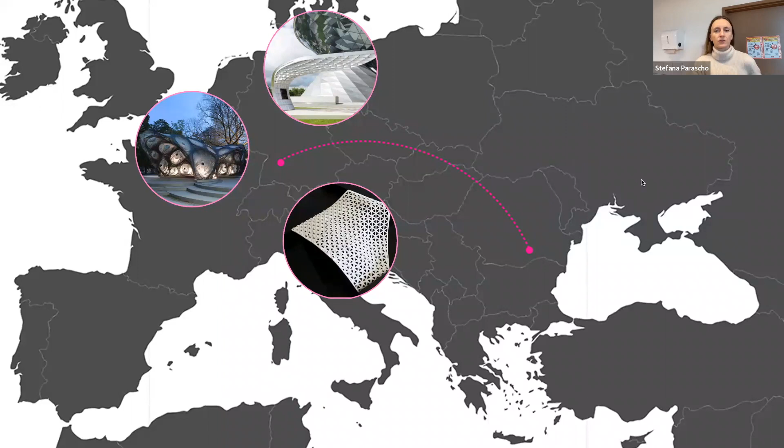After my studies, I moved to Zurich, where I did my PhD at ETH with Gramazio Kohler Research, focusing my work on multi-robotic assembly techniques. Then in February 2019, I made a bigger jump to Princeton University, where I was assistant professor for three years, continuing my work on robotic construction methods—specifically multi-robotic methods—and expanding towards new applications and looking at the long-term implications of digital technologies for design.

Now, since March 2022, so a bit over half a year, I started here at EPFL, where I'm planning to continue the research—it's still a question mark. Soon it should be more specific what exactly we will be doing here, but specifically we're planning to focus on human-robot collaboration for construction.

So I run here the Lab for Creative Computation, Circle. In short, it's a more or less seamless continuation of the lab I led at Princeton, called Create Lab—not to be confused with the Create Lab here at EPFL, so we changed the name to Circle. You can find us at circle.org.

So what are we actually doing here? We really focus on combining design with engineering, robotics, and construction. We have expertise at the lab from architects to engineers and artists, and I'm particularly interested in the relationship between robotics and engineering and the design perspective in architecture. Rather than just thinking about new material processes and how we implement them, I like to explore how these change the way we design and perceive architecture.

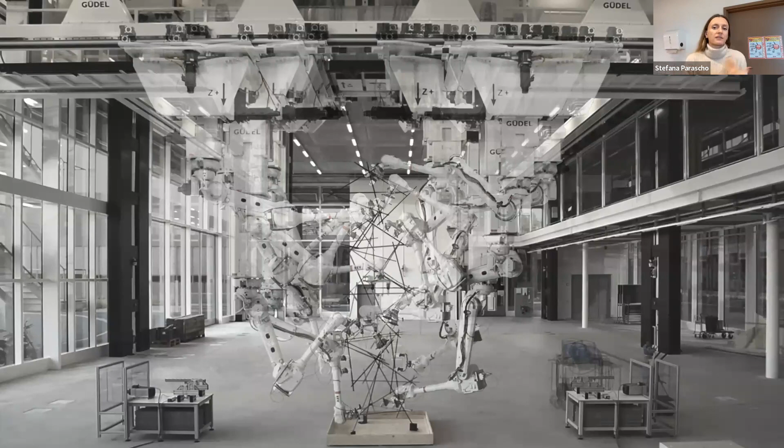So why robots? We look at robots, particularly industrial robots, as generic machines that have specific qualities such as precision, but we look at them from a different perspective than how we're used to seeing them in manufacturing industries, where they typically automate very repeatable tasks—the same object produced hundreds of thousands of times, the robot making the same movements hundreds of thousands of times, such that implementation effort and costs are minimal.

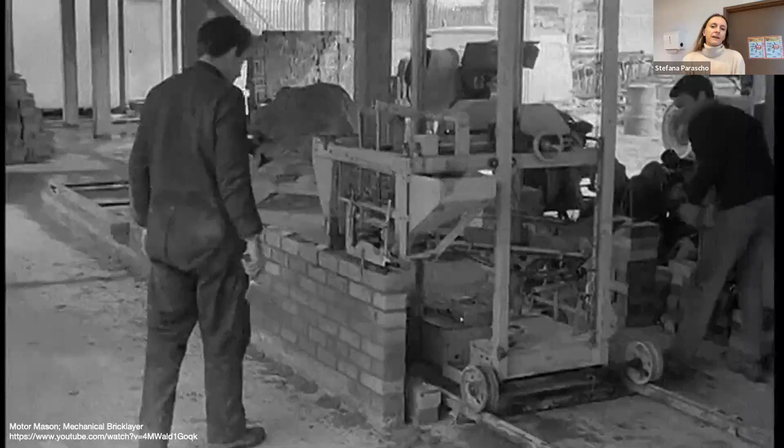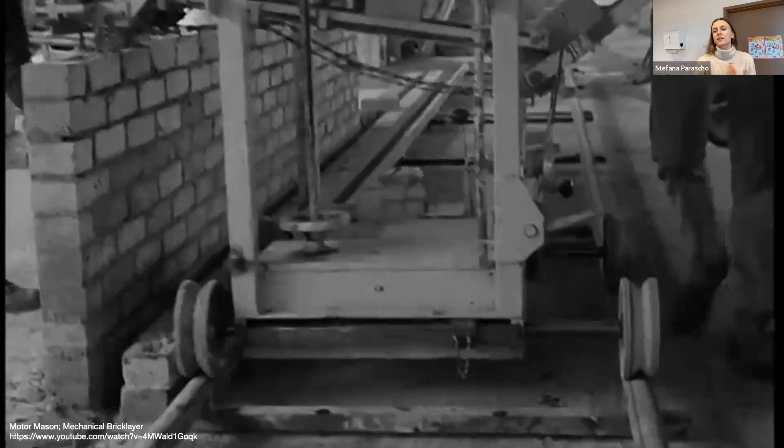We've seen similar intentions in construction even since the 60s. This was a robot from the 60s, still a manual machine that had to be pushed around, but it automated the bricklaying and mortar laying process. Typically what we see in the construction industry is that we automate standardized processes that don't allow for customization or adaptation, but are based on the same processes we know from centuries of analog construction.

So instead, in my field, we look at the potential of digital technologies such as robotic fabrication, precisely in dealing with non-repeatable things—individual constraints, bespoke elements, and differentiation. Basically, a robot doesn't care whether it makes the same movement 1,000 times or 1,000 different movements. So there's clearly potential in robotics for bespoke tasks if we focus less on automating and replacing humans and more on what each of these two parts can do better than the other and how to combine them.

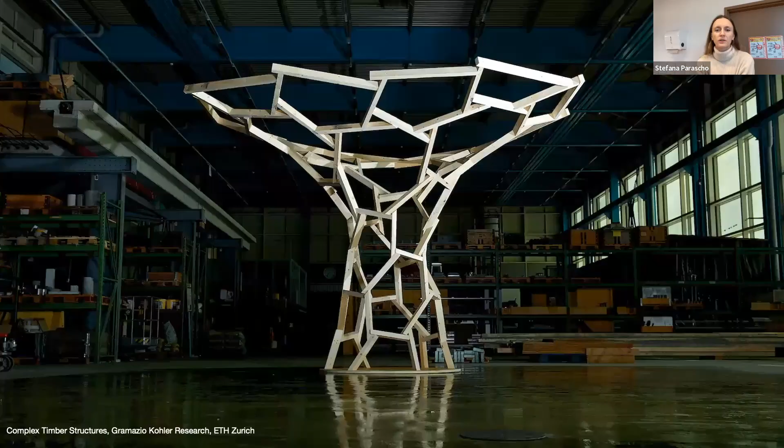We've seen lots of developments in academia in this direction. The field is now about 15 years old, from creating differentiated walls to spatial structures that require individual placement of elements. All of these were built with robots and new material processes. But at the same time, the industry is still concerned purely with automation of standardized processes and increasing productivity that way.

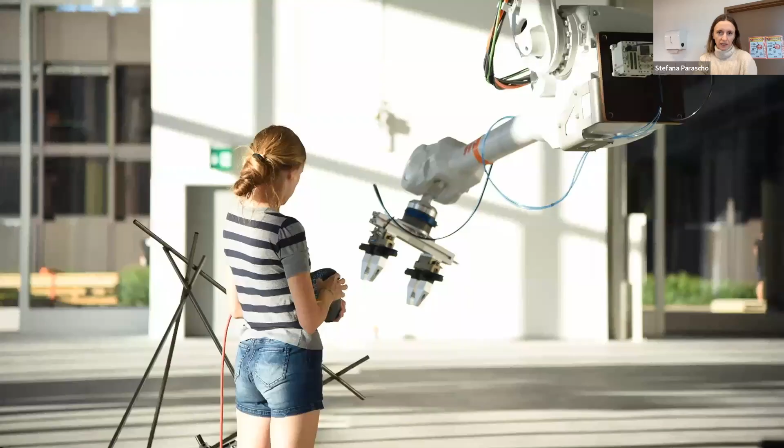So what all the academic projects have in common is they've really looked at questions of how can we build new complex geometries, how can we optimize construction. But I think what we're not asking enough is what do these technologies enable us to do as designers and engineers that goes beyond complex geometry. How can we access new applications and new unexpected goals?

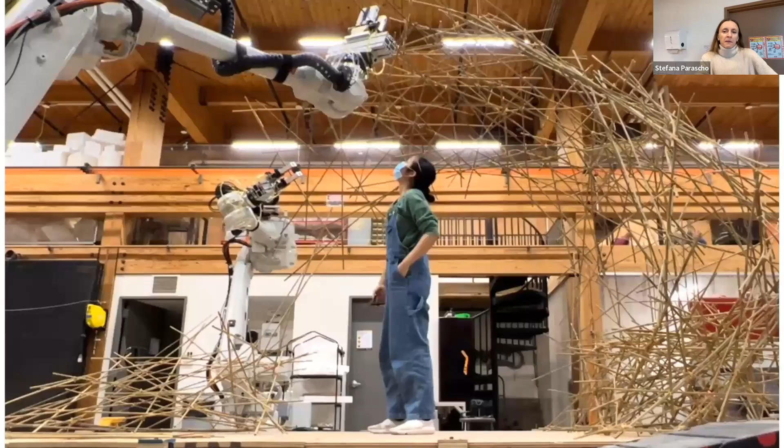In my own work, I like to take a few steps back and think about the role of the machine and our own relationship with technology from a designer's perspective, and look at where the human belongs in this loop rather than where we can remove them from it. My work revolves around using multiple machines and humans, focusing on multiple agents in order to move away from single task processes that are more applicable to automation, and instead explore how multiple agents can collaborate with each other, take on different tasks, and what possibilities evolve from it.

I'd like to walk you through a few projects to give you an idea of the questions and applications that I've been dealing with and that I'm slowly setting up here.

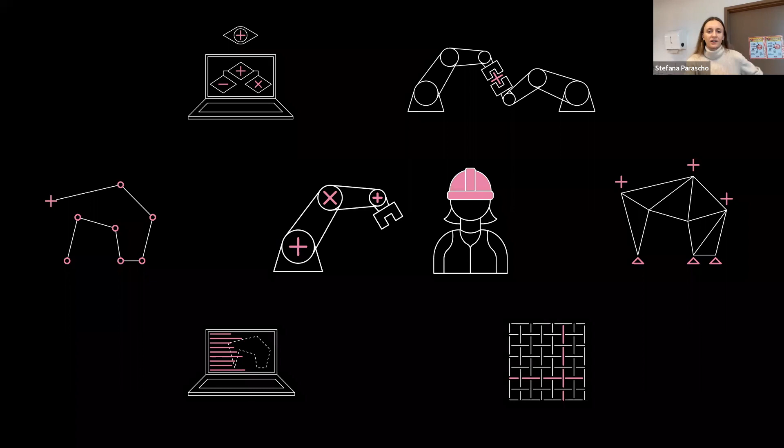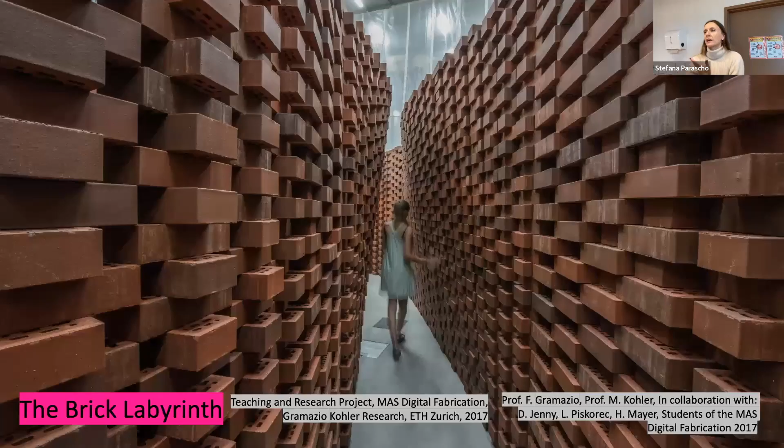Starting with the relationship between structure and fabrication. This is about a project searching for ways of transparent and reciprocal information flow between design, structure, and robotics. The Brick Labyrinth was a teaching project developed together with students of the MAS in digital fabrication at ETH Zurich over 11 weeks. The challenge was to combine planning and simulation with physical implementation and the material tests necessary for such a material system as brickworks.

Brick construction is a long-established tradition in robotic assembly. If you're familiar with construction robotics, it's been one of the first processes to automate, and there have been projects upon projects tackling brick construction. But the reason we chose it, and what we did with this process, was to try to develop a process using only dry stack bricks—no glue or mortar—to make it reversible, and also to scale it up.

This was one of the first projects we did in the fabrication hall at ETH, and it also served as a test of how far we could scale things up.

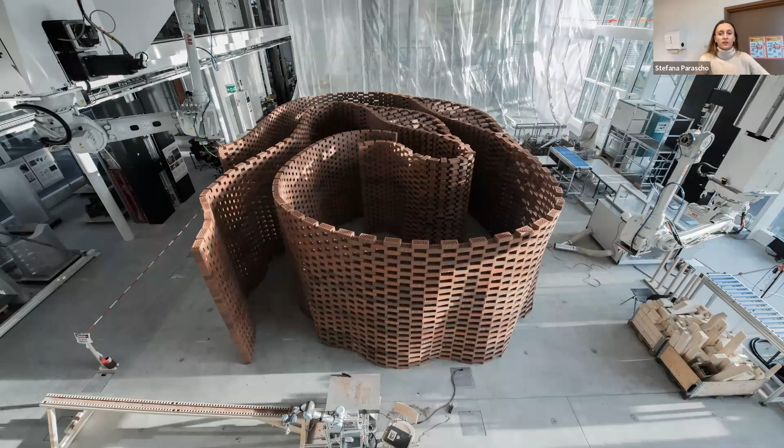The focus of the project was on developing means of simulation and visualization that allowed for safe construction of the 10,000 brick structures, while pushing the limits of the structural system we chose. Students used physical tests in parallel with developing their own simple geometric simulations to quickly evaluate what is buildable and what is not.

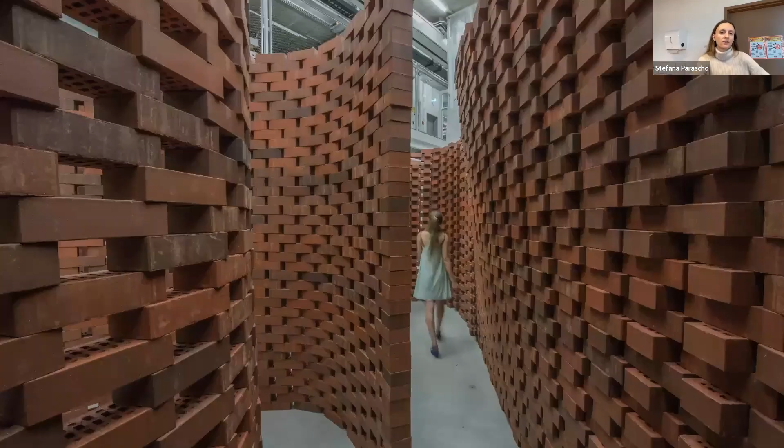We have robotic precision, but this material system works with heavy bricks, which clearly has some dangers with it. So the goal was to increase the height and the angle of these leaning walls through the precise placement of the bricks.

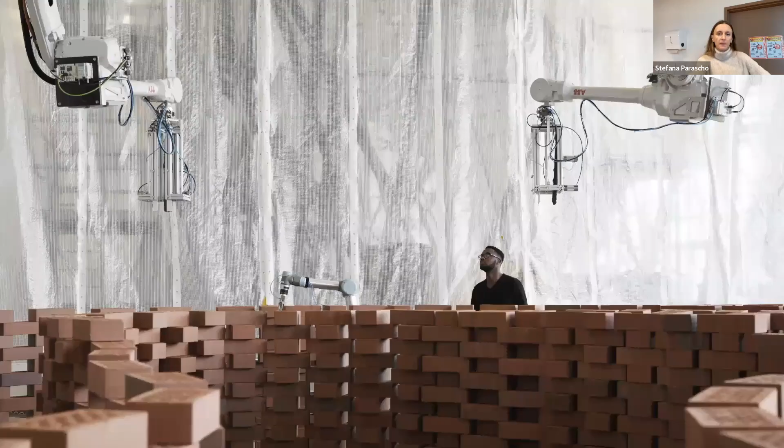In this case, the walls are only stable due to a double layer system that the students found through physical explorations. Stability was, of course, one challenge, but the robotic construction remained the other.

The complexity in the design had increased with the fabrication, since we had to develop a sequential assembly process where the walls had to be constructed in an order that ensured stability, reachability, and no collisions at the same time.

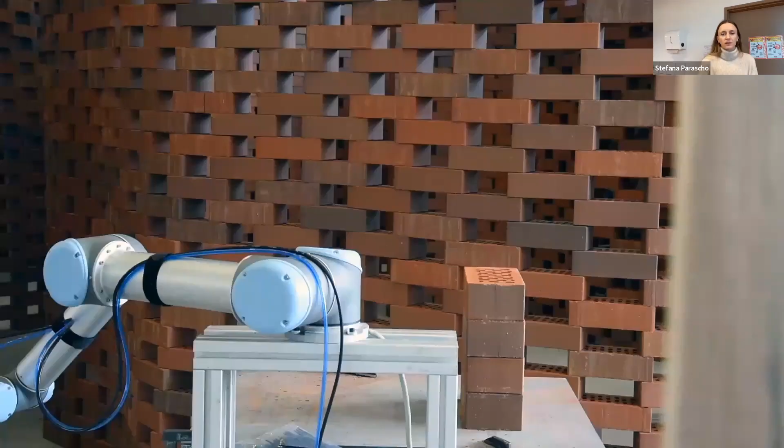Since we're talking about multi-agent construction processes, in this specific project we aimed at full automation. We weren't really looking at the role of the human, particularly because of the dangerous nature of the construction, so there was a purpose in keeping humans away from it. Instead, we used different types of robots of different scales and sizes to take on different tasks.

So you've seen the small robots that are prefabricating these brick stacks, which are then picked up by the larger robot and placed in position. And in the end, this allowed us to build the labyrinth in less than 3 weeks, and it consisted of about 10,000 bricks.

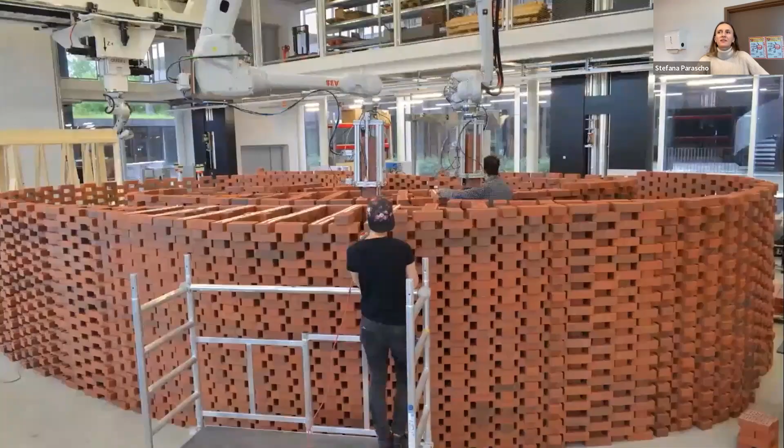Less than 3 weeks doesn't sound so fast. It is fast for us because we run all these processes in manual mode and testing mode, because we cannot test them for robustness as you would in a factory. So every single move is an experiment in itself. If you see them in real time, they move really slowly. So it was an achievement for us.

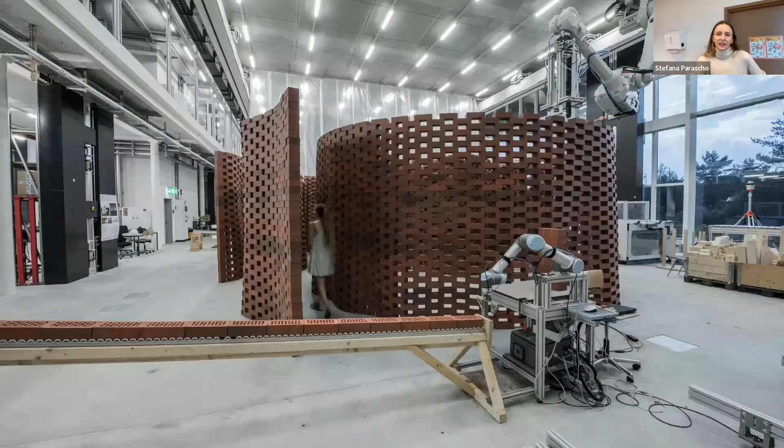I think the takeaway from this project was that for any construction process, we can't really focus individually on a highly specific problem like the sequencing or the placement of the bricks, but we need to consider all the design factors or all the constraints that come together. And that can only be achieved through this combination of physical testing and computational simulation prediction.

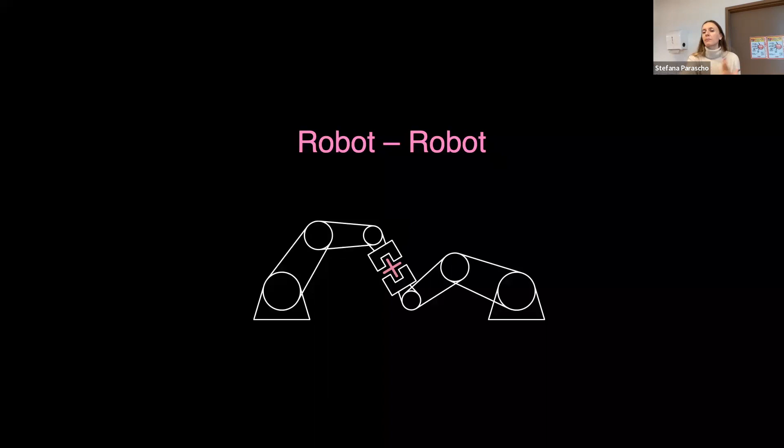So this brings me to my next project, which specifically dealt with these complex constraints, such as they result from multi-robotic processes in which the robots work together. This is my PhD thesis, which focused on cooperative robotic assembly techniques for the construction of bespoke space frame-like structures. By using the robots cooperatively, compared to the previous projects, they don't work separately on their own thing, but they really work together.

And it allowed me to build spatial structures that don't need any additional form or falsework anymore, because one robot can always serve as a support.

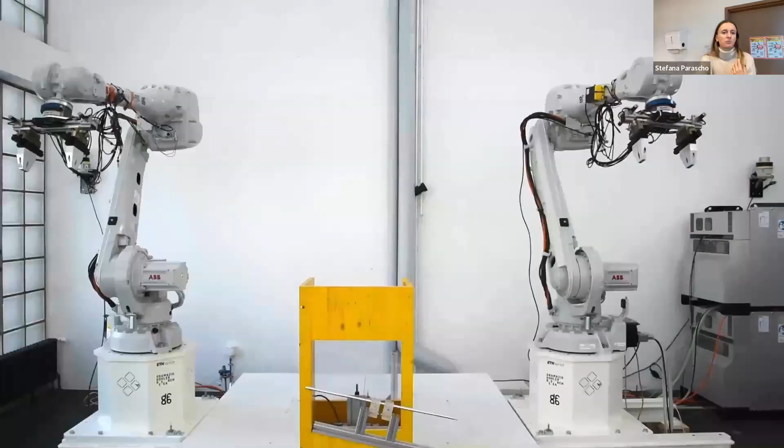So in a simplified way, the construction method works as follows: one robot brings an element, a second robot brings an element, the connection is made, in this case, by humans, and then the other robot can continue. So there's this alternating process, such that one robot is always connected to the structure, and that gives it stability, getting rid of the need for any sort of guide structures or supports.

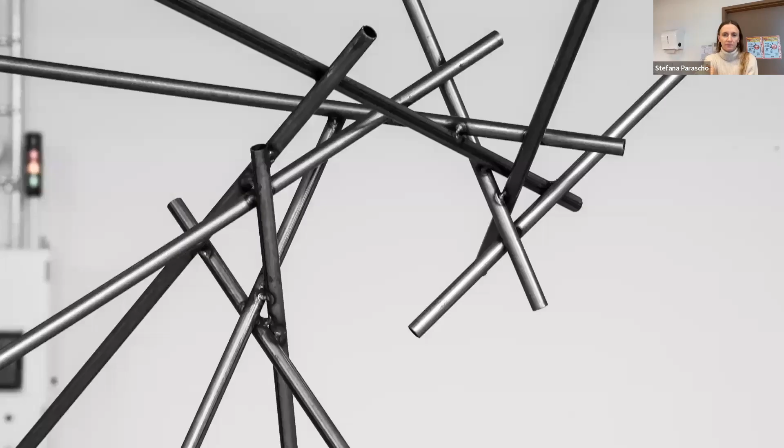But really the trickiest part, or the biggest challenge, was less developing this robotic procedure, but dealing with the highly complex dependencies that emerge from the design parameters that can't really be addressed intuitively. So I'll give you a quick example. When I started looking at this system of space frames, I searched for a new type of connection that would allow for simple fabrication and for the geometric freedom I was looking for.

I didn't want to use any prefabricated additional elements, which require extra logistical effort and fabrication effort. Instead, I proposed an open node where only 2 bars connect to one another at a point.

However, of course, what happens when we shift these bars in a node is that it leads to bending moments in the structure and reduces the stiffness. So in order to counteract this effect, I introduced a second connection point in each joint that results in these closed triangular connections that dramatically increase the stiffness.

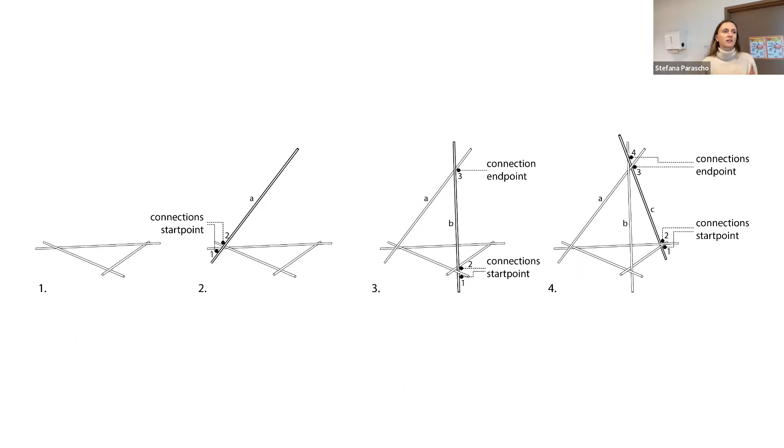And while this solved the structural problem, it led to very, very specific geometric constraints. At every step of the construction, every new rod had to connect to the existing ones at least at 2 points—it had to be tangent to the 2 existing bars at 2 points, which means its position in space was predetermined, it could not be chosen arbitrarily, but was a result of the parameters.

And it leads to a solution space of where this bar could lie that is more complex than it seems. Particularly, there are areas where there is no solution, which have to be taken into account when we try to design the structure. While it's kind of understandable in the graphics, when you have a node with tens of connections, it's really difficult to intuitively understand where the bars should sit and lie. So it's really hard to design with these types of constraints.

So what I'm saying is that this tiny little shift for designing a structure turned into quite a nightmare for a designer, because it's really hard to control these parameters. So we need to think about, besides developing the computational tools to be able to work with these parameters, also ways of analyzing and visualizing these things so that designers can really work with it.

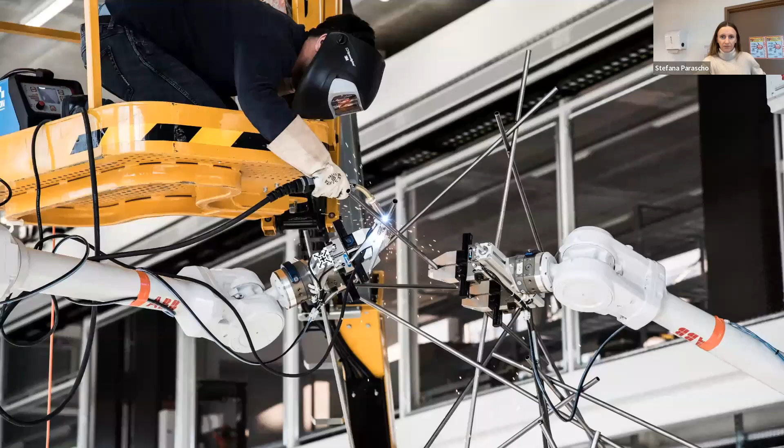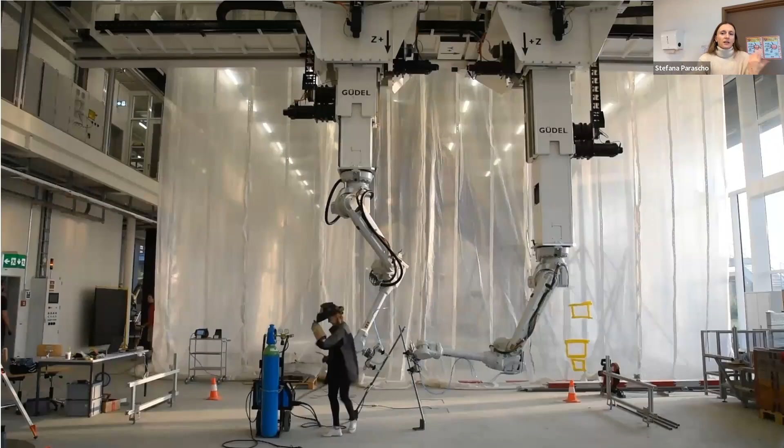Besides the geometric complexities that had to be solved, the actual physical materialization process also goes into the design process. In this case, I worked with a material connection that was both easy to execute and very strong: welding of steel bars. The welding is implemented manually by humans, while the robots are used purely for positioning and holding of the parts.

The reason for this is that I was interested in identifying the processes for which robots are better than humans, which is holding elements in space precisely and for a long time, and vice versa—dealing with very complex movements and little tolerances is something that humans can do very well.

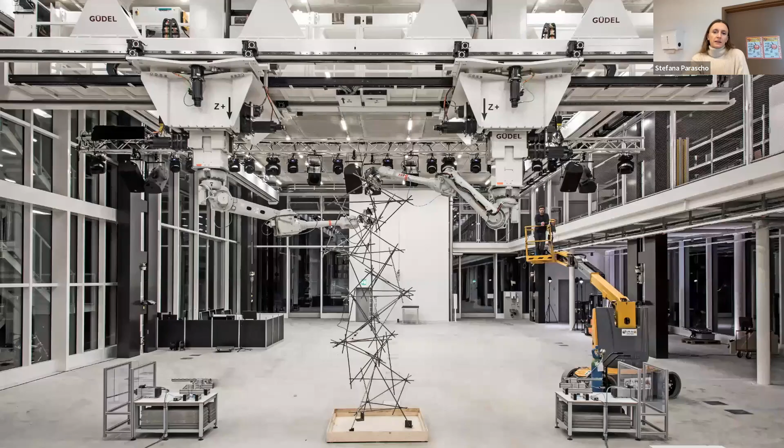That's partly what led into current research that I'm doing, which is on identifying these ways that humans and robots can work together beyond necessarily the separation of tasks.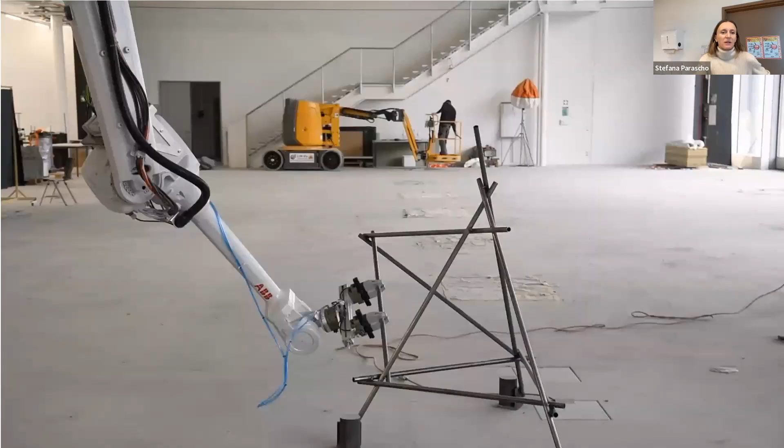Besides the material processing itself, we still have the challenges of the robotic construction method. Working with two robots in the same workspace where they can reach within the same space, and within a constantly changing environment because the structure is constantly adding, is kind of predestined for little catastrophes, meaning collisions. And being active in a discipline that relies a lot on intuition and human creativity, it's not very easy to address these highly unintuitive robotic challenges.

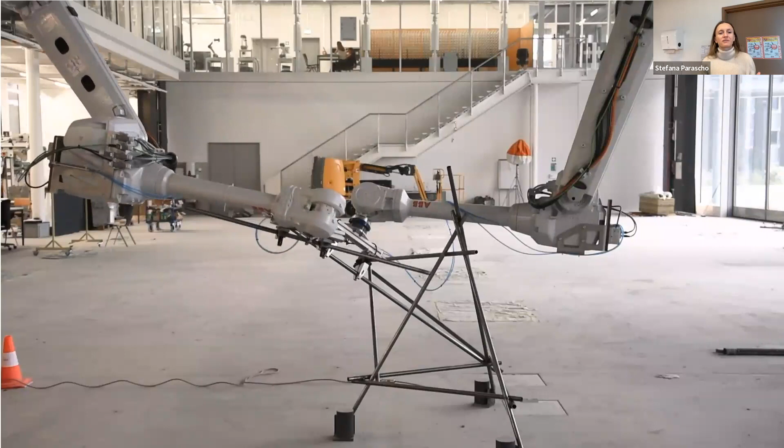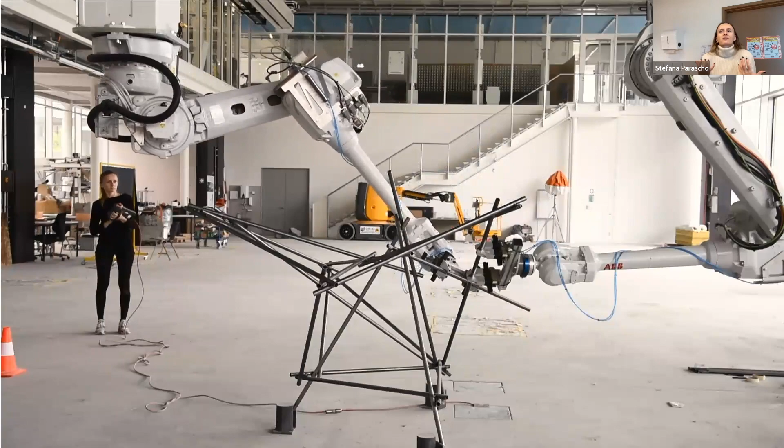So we use path planning here. We connected it to existing path planning algorithms, and we're able to introduce this into designer software so that we can work with it. But really the challenge is to bring together these different types of solution spaces, where as a designer you work in a two-dimensional or three-dimensional Euclidean space, and then the robot has its own six-dimensional rotational space, and it just becomes very tricky to handle intuitively.

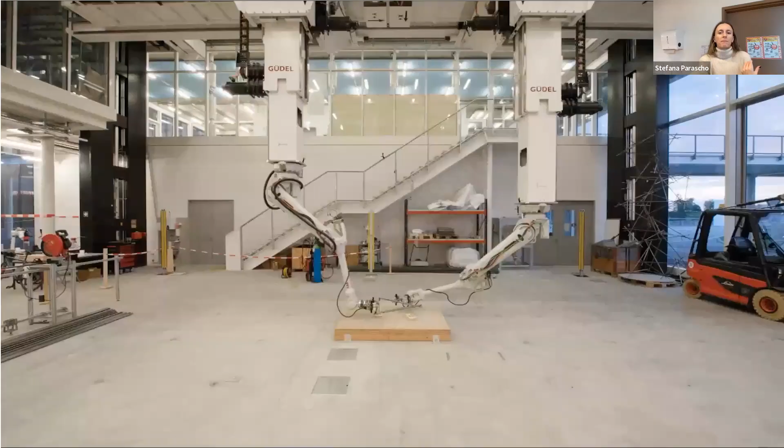All of this led to a sequential process in which the structure is basically designed and generated in the exact same order that it is fabricated, for that exact reason—so that one can check and find solutions for the reachability, path planning, and robotic constraints at every point of the design process, rather than designing a structure and then trying to have it fabricated and realizing it's just not doable because of the constraints and limitations of the robots.

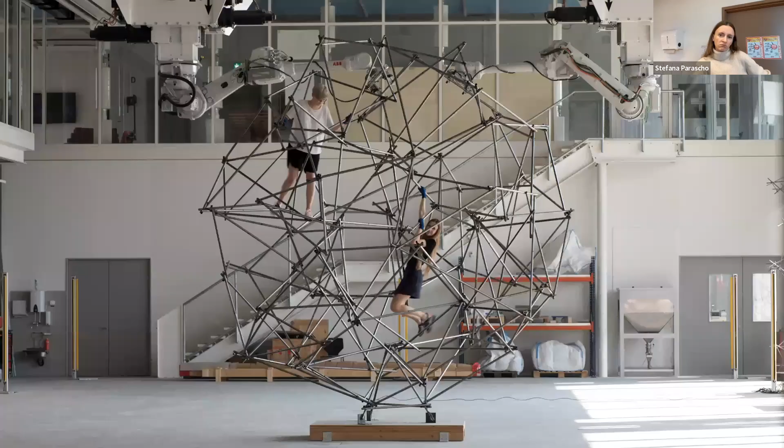This is just an example of one of the demonstrators that we built, which consisted of over 300 elements. And then we did some very professional load testing. It behaved as expected.

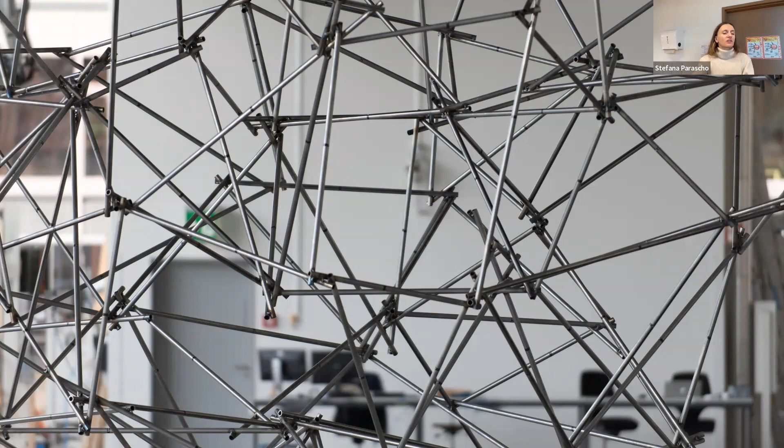What I want to say with this project is that using the digital technologies we have available, as designers it can very quickly turn into a rabbit hole of dependencies and all sorts of unintuitive problems that designers are not typically prepared for. This makes the acceptance and application of such technologies a lot more challenging than in non-design-based fields.

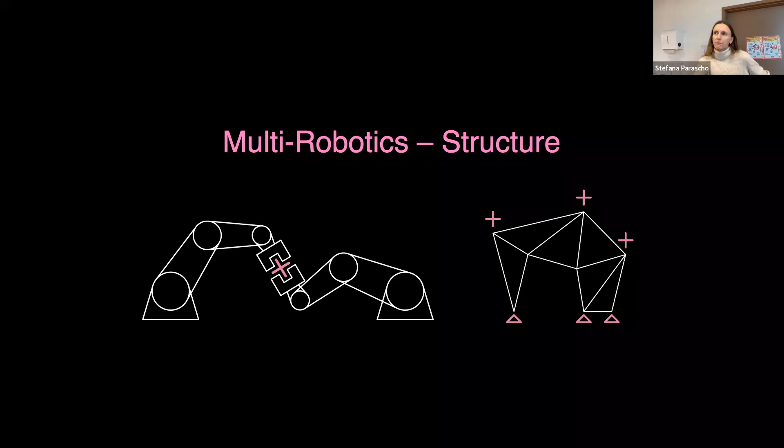Building up on the previous two projects, the following one combines basically the brickwork and the multi-robotic assembly techniques. The LightVault is a collaboration with SOM Engineering and with the Form Finding Lab at Princeton University. It resulted in a prototype that we exhibited in London in 2020—unfortunately only for a few days before the COVID lockdown, but we still got it built, so that was a success for us.

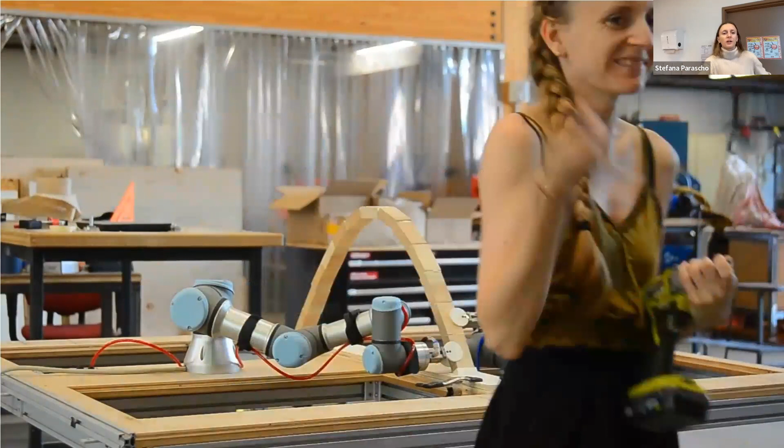We focused on finding ways of constructing vaulting structures out of heavy brick material again, based on the methods I had developed for the steel structures, using the two robots to collaboratively assemble an arch such that it does not require any sort of support structure, guide, or additional support.

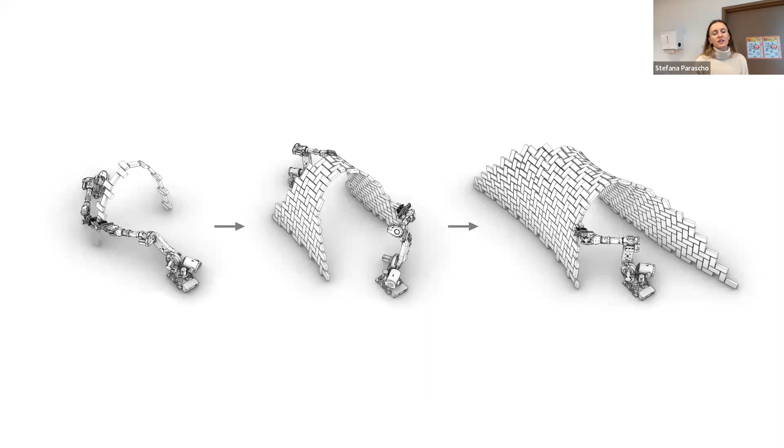The challenge, again—well, there were many challenges—but maybe the main one was designing the structure in a large interdisciplinary team with different vocabularies and expectations. What it resulted in was a glass brick vault that was built with two robots, starting with a cooperative arch that could be built by two robots working together, which served as a backbone structurally, and then continuing with the robots working individually from the arch outwards to complete the structure.

And instead of working through individual design options, sending those around through the team, we specifically used the robotic setup to identify and visualize the design space that spans between them, and to find out the influence that the sequence and the building direction had on possible designs.

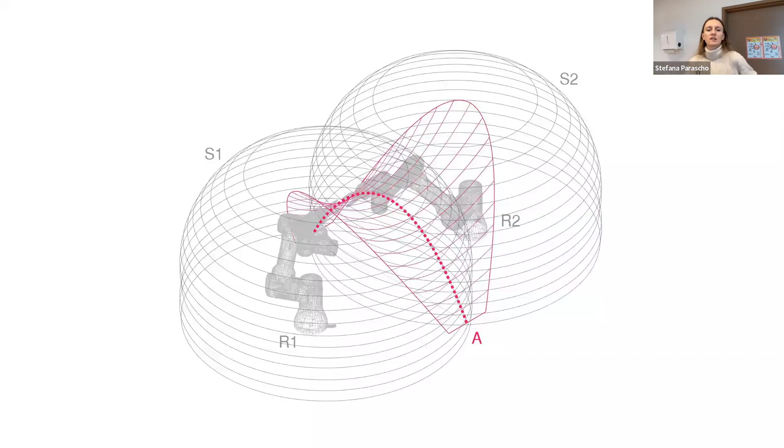So, for example, the vault is shaped upwards towards the ends, not only for structural reasons—it did help structurally as well—but also because of the reach of the robots. Where they have to work together, they need to reach a bit lower, and then they start building above their own heads, so to say. So it was a result of both the reach of the machines and the structural requirements.

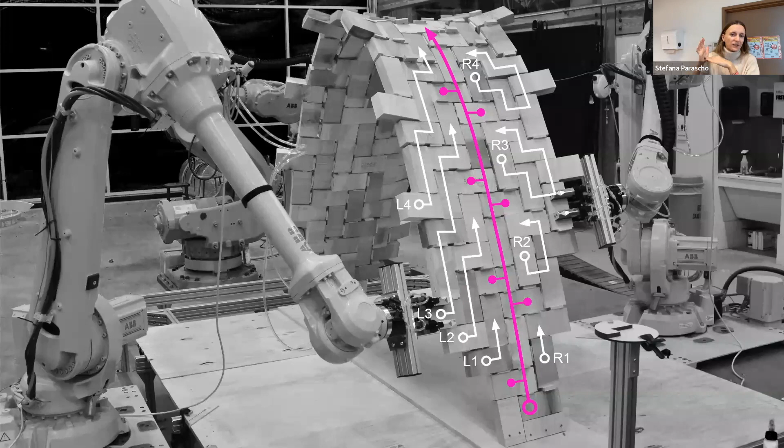And all of these temporal dependencies—where do we start building and where do we end—they also become quite visible in the pattern and the sequence definition that we came up with, which had to ensure stability not only at the end, but also during construction at every step. So, for example, we calculated a sequence such that every brick, when it's being placed, has two sides where neighboring bricks exist that you can connect to, so it never just sits on one side, so that it doesn't just fall off for no reason.

We did use glue in the structure for several reasons. One being that this was exhibited—it was built during the exhibition in a publicly available space—and we had people running around, so we really didn't want to risk anything. But also to ensure the stability during construction. We had form finding done for the final shape to make sure it's only under compression, not for every step of it. We did have an analysis to check every single step to be sure that it was stable, but the design process was not made such that at every single step it would be stable without the glue.

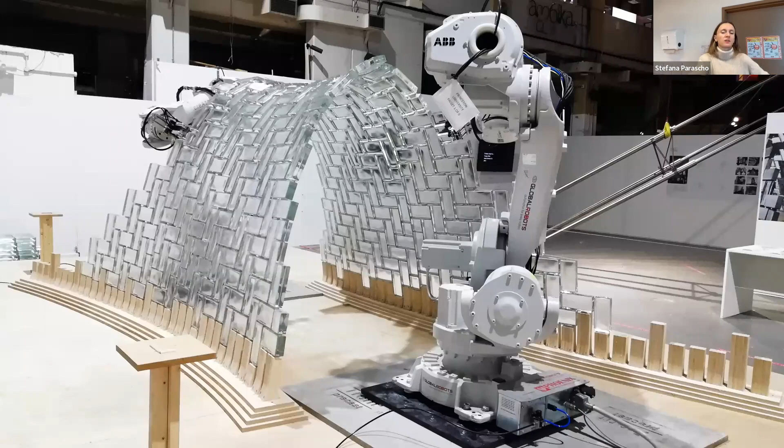And I have a short video that I would like to let run, just to check on the sound. I don't know if it goes through Zoom. Otherwise, I hope it's not super boring for the ones watching, but I was just going to let this run.

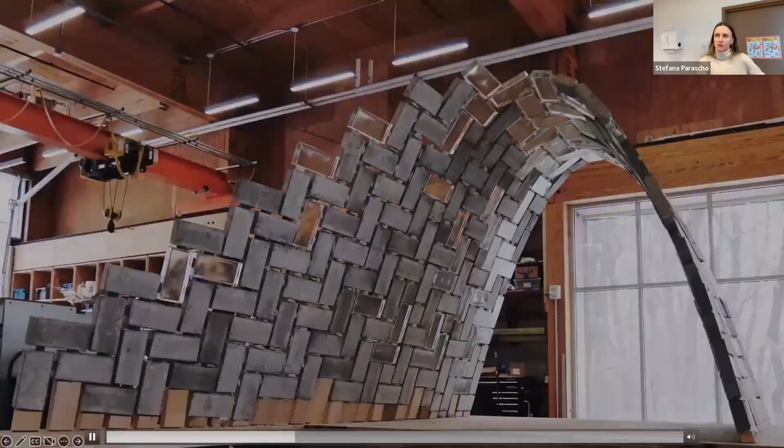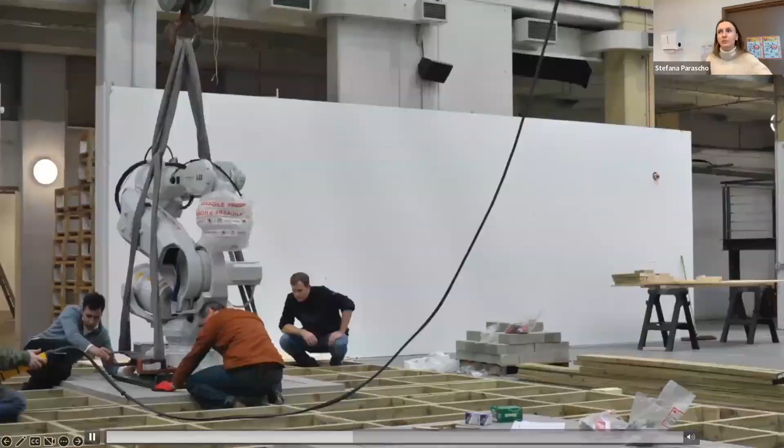Just in case the sound isn't working, I'm just going to randomly speak a little bit so it's not so awkward in the recording. We tested everything in the lab back at Princeton, and we did quite some prototypes over there with concrete instead of glass, because it's cheaper and easier to make.

And then we moved everything to London. We had two robots that we borrowed from a robotics provider over there that we set up locally, and then built it all in situ.

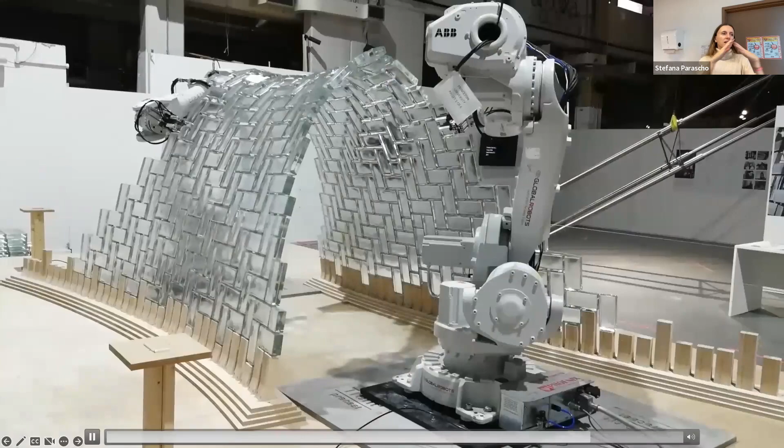They sit somewhere in there.

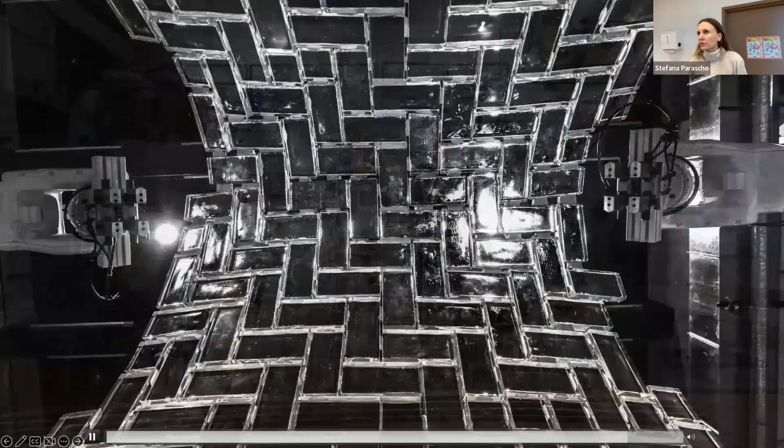Right, sorry if it didn't have sound. It's a bit sad to watch three minutes without sound. But you can find it online if you really want to see it with the sound.

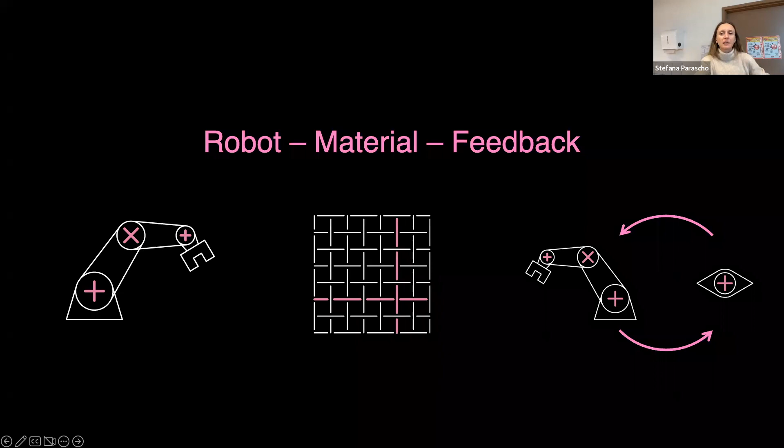So yeah, this brings me to my current projects, things that are going on right now at the lab, where I'm looking at applications that go beyond the construction of complex geometries. Zero waste is one project that I started at Princeton University in collaboration with Aaron Bessler, a design professor there too, in which we investigated what role robots could take on in monitoring existing structures and engendering material reuse. So I'm currently continuing this line of research here at EPFL in collaboration with Corentin Fivet.

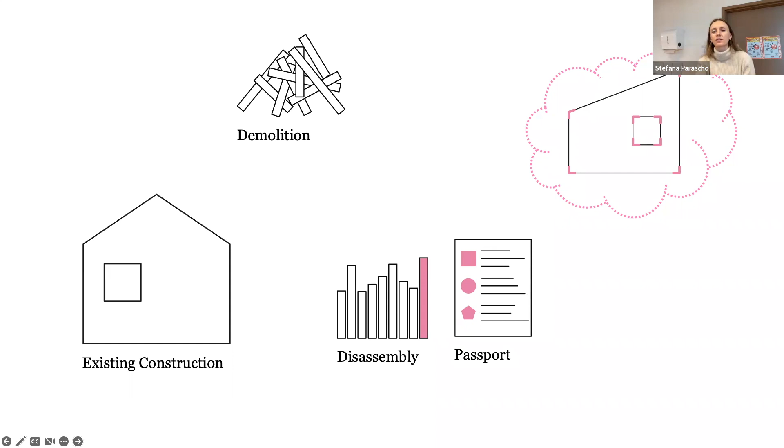Back at Princeton, we started by looking at the life cycle of materials and how much waste is produced in construction, and identified two main questions. How can we work with the existing material that's currently in use in buildings, and how can we plan and build new buildings, or even those built out of reused materials, such that they specifically facilitate the reuse of the material in the future.

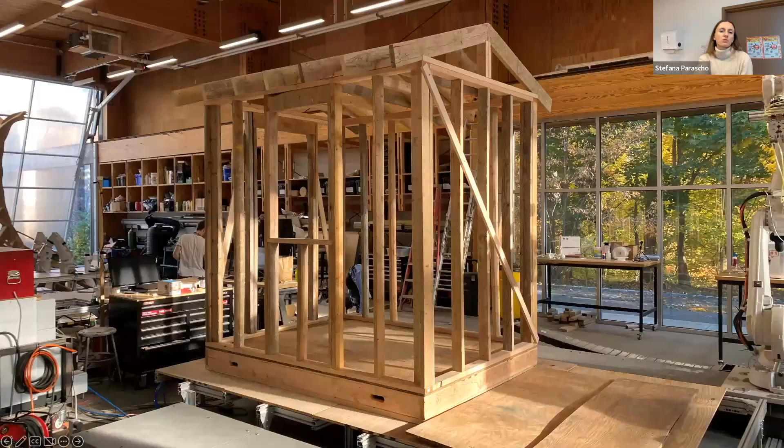So we went all in. We handpicked a number of timber elements from the local recycling facility, which we then assembled into a shed, this time by hand.

This was not built by robots, built by students. That was meant to be representative of the typical American wood frame construction. It's really the sort of material system that is widely used in the US, and what we wanted to work with.

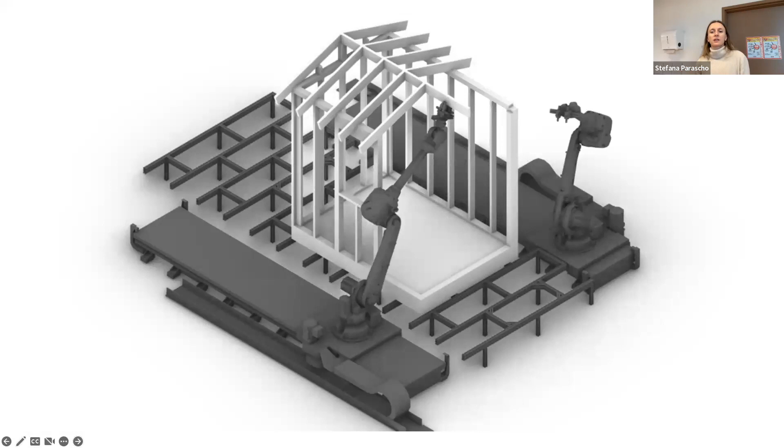We looked at two topics. On one hand, how can we use robots for the disassembly and reconfiguration of such structures, going back to the advantages we identified, that robots can serve as support elements and take on different tasks, not just assemble things.

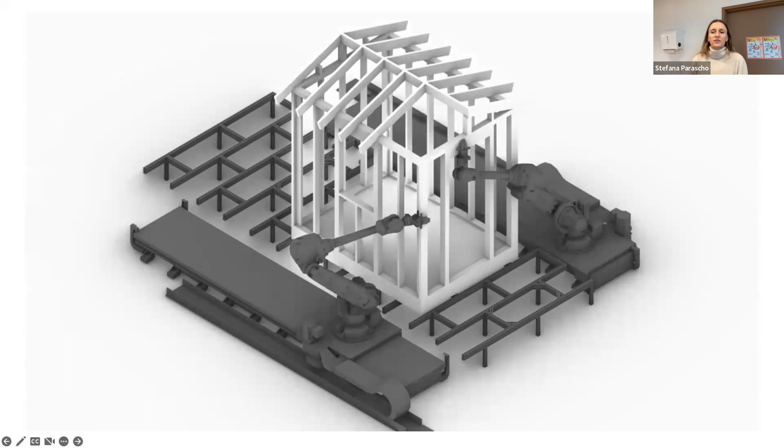The second question was how we can develop a scanning and tracking system that not only recognizes material components and stores information on their use, but also helps visualize this type of information for non-expert users, to increase awareness for reusability and material history.

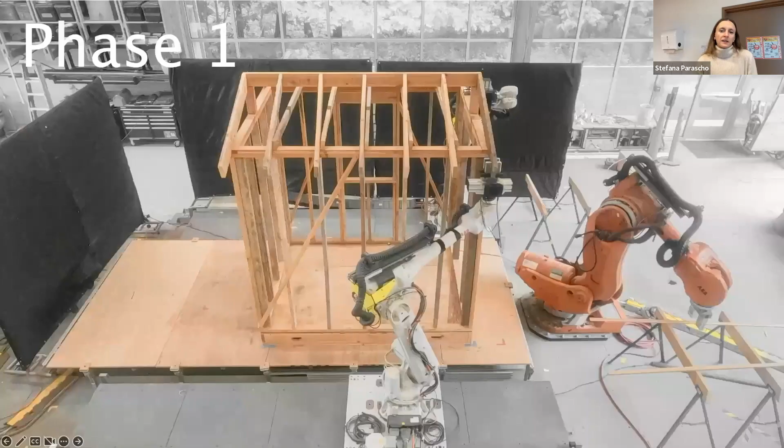These are results of the first implementation of this case study, split into four phases, each exploring a different spatial process. The first was pure disassembly using three robots this time. The second phase was disassembly, then using the same material to reassemble parts of the structure. Phases three and four try to get the reconfiguration done in the same process as the disassembly.

We're now expanding this approach to have more automated planning for real-time reconfiguration of structures. It's a project that will start early next year, so hopefully pushing this forward.

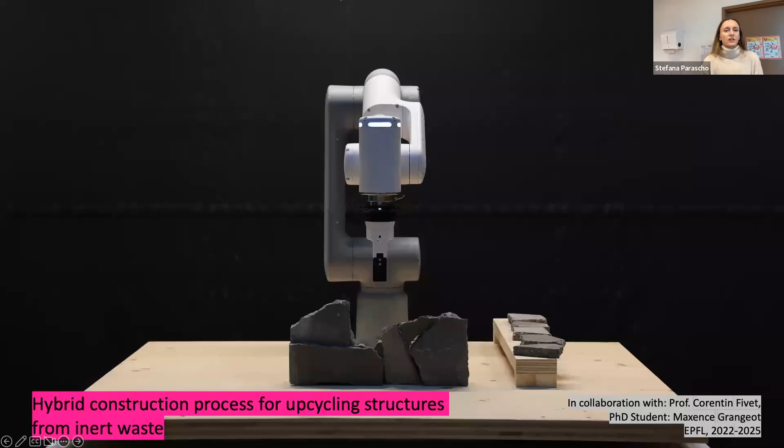At the same time, we're looking into the reuse of other materials, not just wood, particularly for Switzerland. I have a PhD student, co-directed by Corentin Fivet, who is looking at inert waste—materials that cannot be burned—specifically concrete and bricks as they come out of building construction waste.

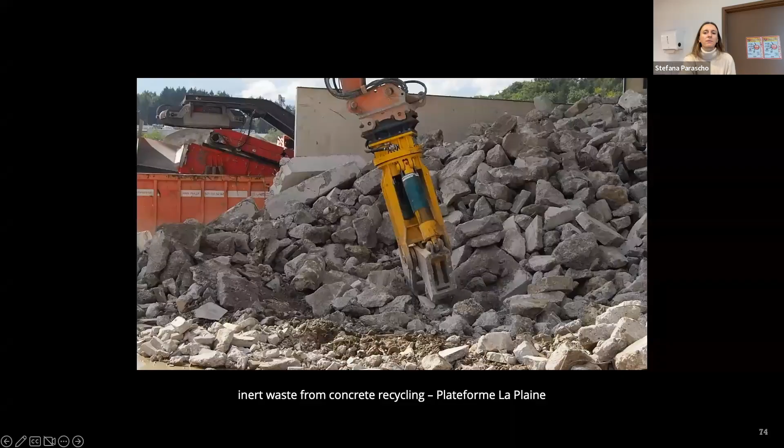He's looking at the workflow of concrete and bricks, these types of materials as they come from demolition sites, and where we can intervene to make use of them, thinking about where we can use machines such as robots to reuse and re-employ these materials before they're basically turned into filling for new concrete.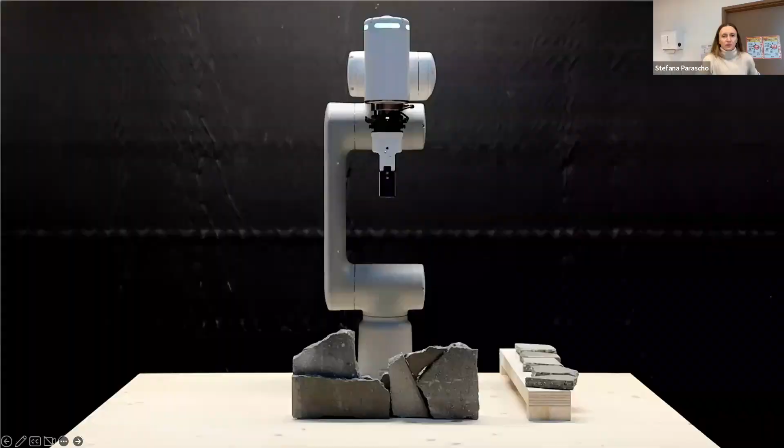In the best case scenario, by making use of robotic precision in orientation and placement, we can work with these materials of unknown or unplanned shape.

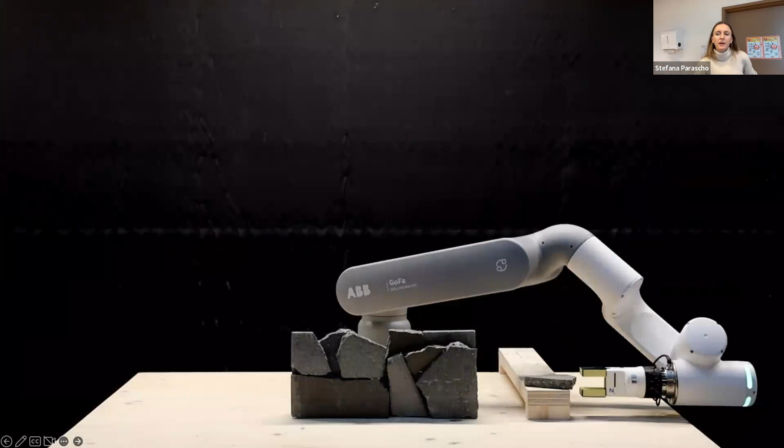In this case, the robot is also a placeholder for larger construction machines, such as cranes, since construction operates at a very different scale. So we're looking at the capacities of robots, but also thinking about what existing large-scale construction machines can do, and how we can augment and improve them to make them usable for this type of scenario.

I'm faster than I thought I would be, but I want to wrap this up with a project that's very different—one that doesn't use robots at all, but focuses on media technology and how it can shape public space. Social Signals is a project that looked at how we can use new technologies to improve our spatial experience, and it started and focused particularly on the pandemic scenario.

This is also a project that started at Princeton, which we are continuing right now. It started in 2020, where we were quite intrigued by how inflexible and inefficient the static markings were with regards to social distancing. So we wanted a more dynamic system that can utilize human movement to adjust the type of visualization seen on these markings.

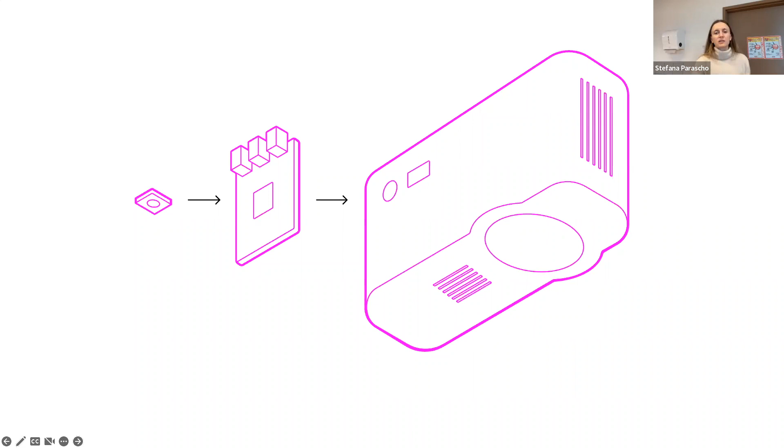What we did is propose a smart projector system consisting of a projector, a mini computer, and a camera, which can capture people's locations and compute safe movement trajectories. Ultimately, it would project these trajectories on the floor as a type of indication to guide pedestrians in public spaces.

We use a deep learning-based approach for pedestrian detection. We aimed for a system that allows the projector to be deployed in as many different types of spaces as possible, while still accurately detecting people. We then developed a visualization based on shaders, mainly to allow for even more adaptation than we anticipated.

As the pandemic evolved and social distancing slowly disappeared from our lives, we were surprised to find that our system could be very useful in the context of public space, as public space gained a new perception and role. People were really eager to spend time in public spaces, so we moved away from focusing on distancing people, toward visualizations that could help bring people together, connect, and interact.

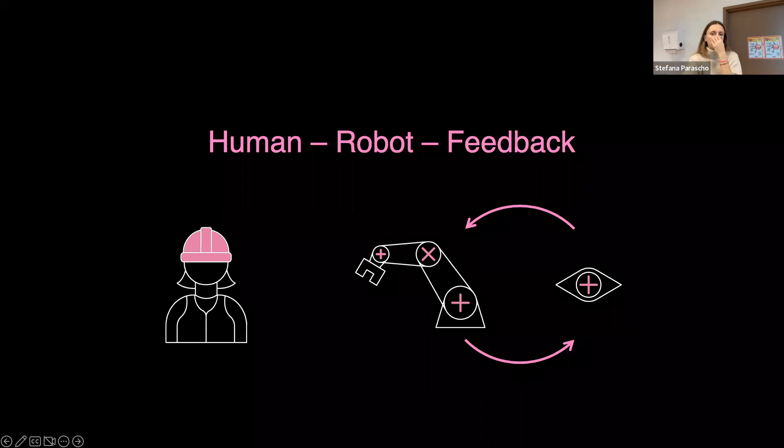We're focusing on questions around humans in the process of robotic construction, especially how we can go beyond optimization and solving problems just to materialize certain geometries, and instead explore creativity and the impact robotic technologies and machines can have on the creative process. We're looking at how humans and robots can co-design structures, whether there's added benefit, and what parameters or constraints might be involved.

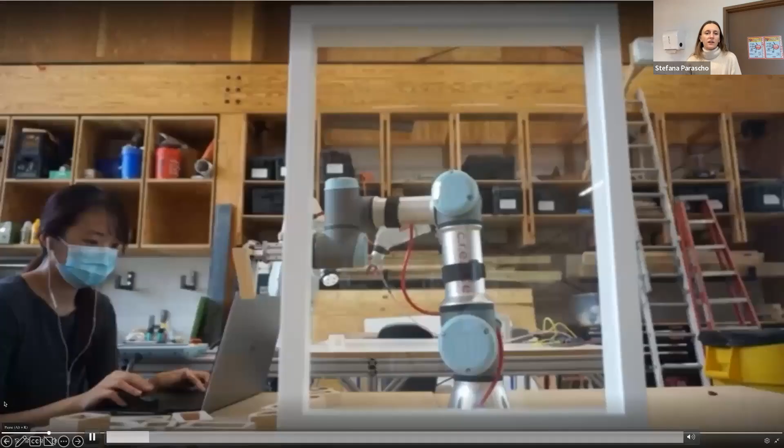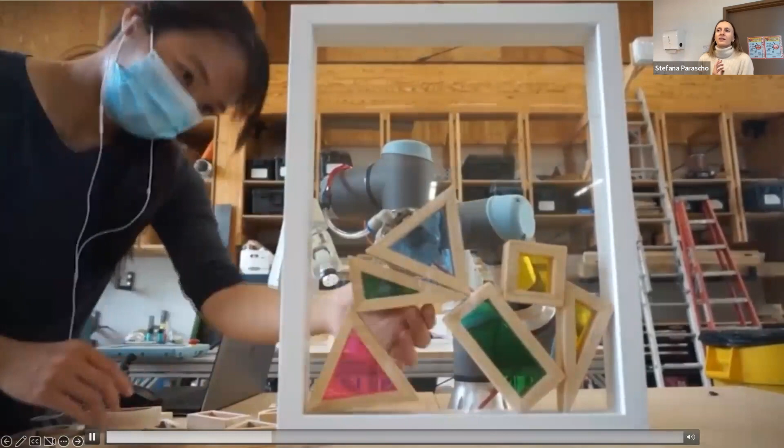This is a project from Ayla, a PhD student I'm advising at Princeton, who's exploring how humans and robots can work together, not just dividing tasks, but as somehow equal partners in a creative process. In this case, the robot places a block, then she tries to fill the space within it, and the robot places a new block, and so on.

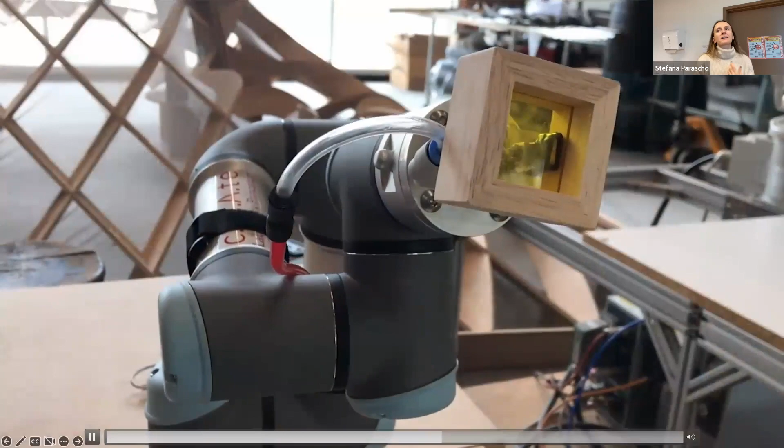What she was interested in is the impact this has on the creativity of the process. If you ask a human to just fill this frame, they'd probably use rectangular blocks stacked on each other to find a relatively good solution. But by using the robot to set constraints, you get much more exciting and creative outputs. She's also been looking at this type of co-creative process at larger scales.

Our goal is to find possibilities for humans and machines to work together throughout the entire architectural process, not just the execution phase of a material process, but to find where we can engage with machines from the earliest design points, and what that could lead to.

We're also doing work on making this type of process, materials, and knowledge accessible to students and the design community. This is a collaboration with a colleague from TU Munich, where we're setting up a platform targeted at design students to transmit this technical knowledge, so they can jump quickly into working with these machines, leading to more engagement.

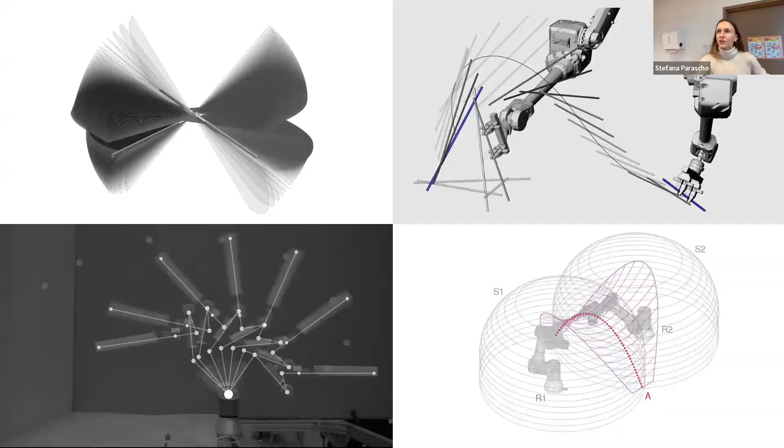And yeah, this is actually where I'll end. I've never finished before, now I have. Thank you very much.